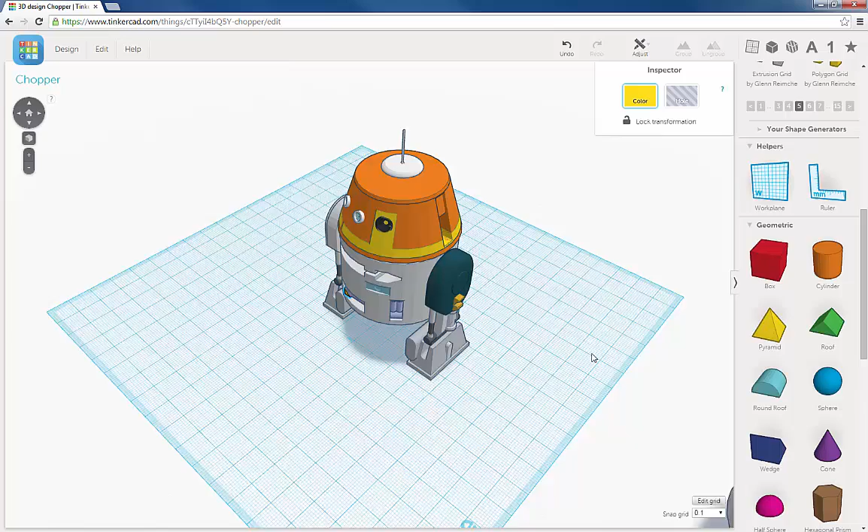Okay, let's hit this running. So now we're going to put in his arm, his rope, his little mechanical arm in here.

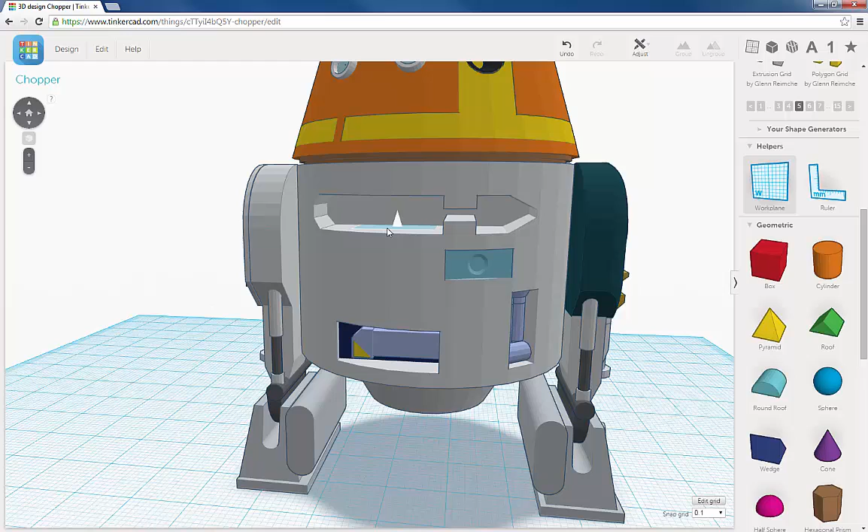So, best way to start that would be to put in his cylindrical joints. We're going to use the work plane tool, it's going to make our life a bit easier.

And instead of using the standard cylinder, I'm going to use one of our cylinders here because they give you a bit more control. So I just have to find the right one.

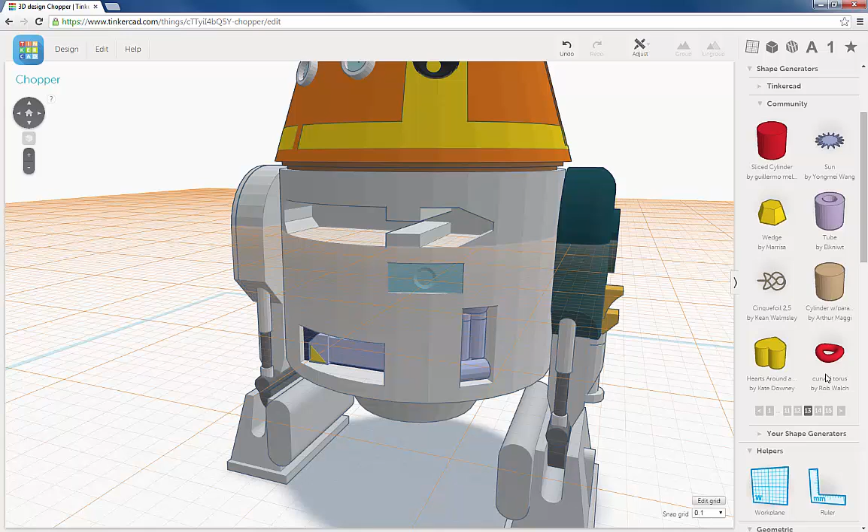It's not these. There's one other one. Okay, I think this is the one we want.

So let's see, yes, we can control the radius. So right now, let's drop this down to 3 by 3.

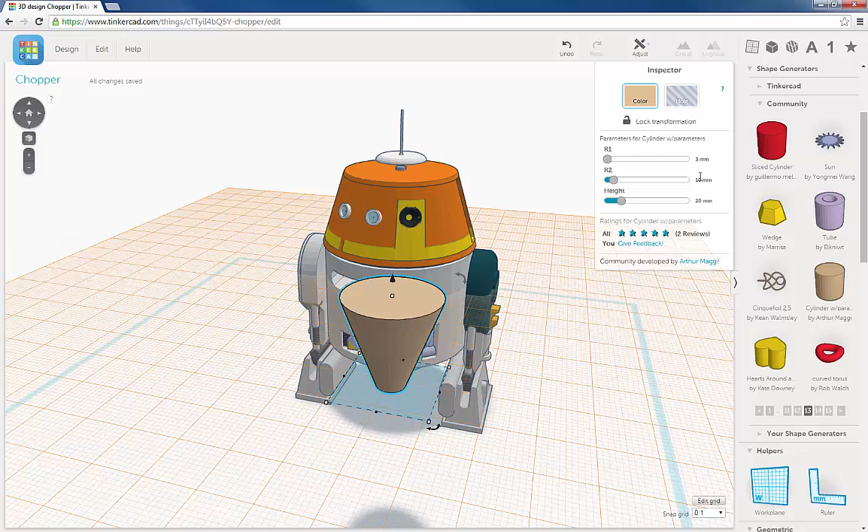Still too big. Height down to 2. The height, that is. Alright, now let's move it over so we can see how it looks.

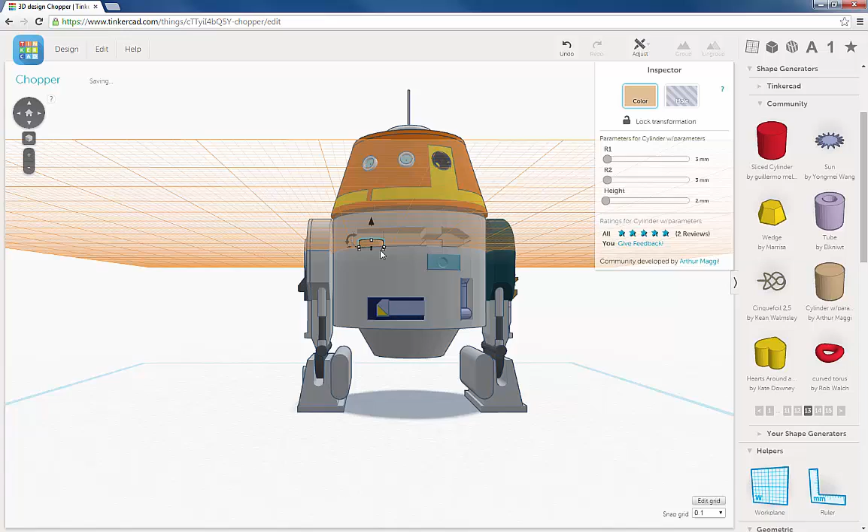Hit F to zoom in. Okay, so yeah, that's a bit too big. So let's go down to 2 by 2.

Okay, I think that's about right. Go to 1 millimeter in the height.

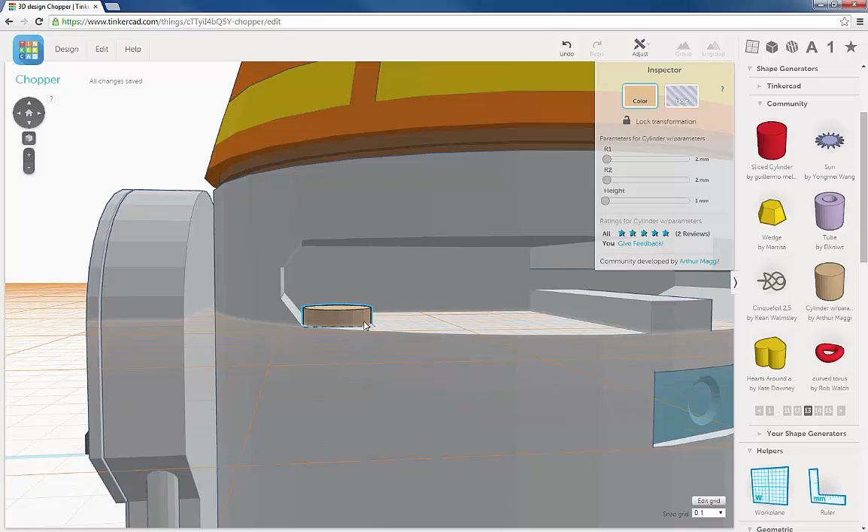Might be able to go to 2. It's a little high, so let's try 1.5.

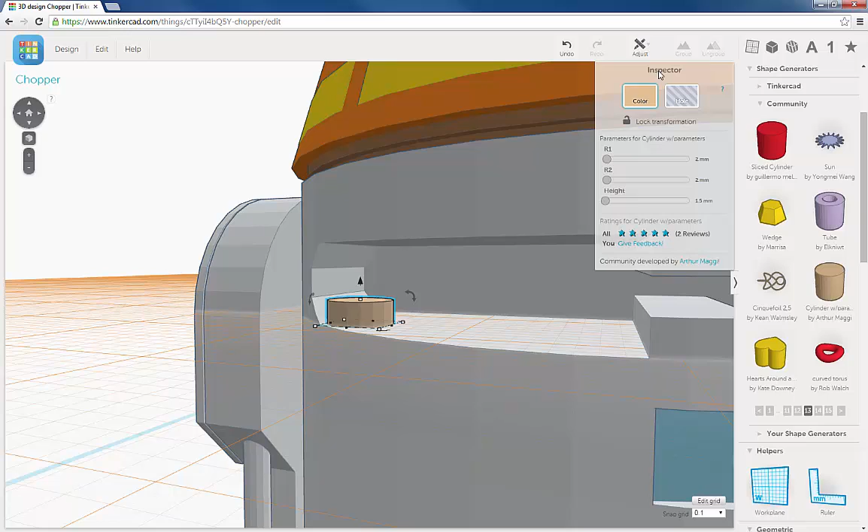And I'm going to change the color. So we're going to go edit, duplicate.

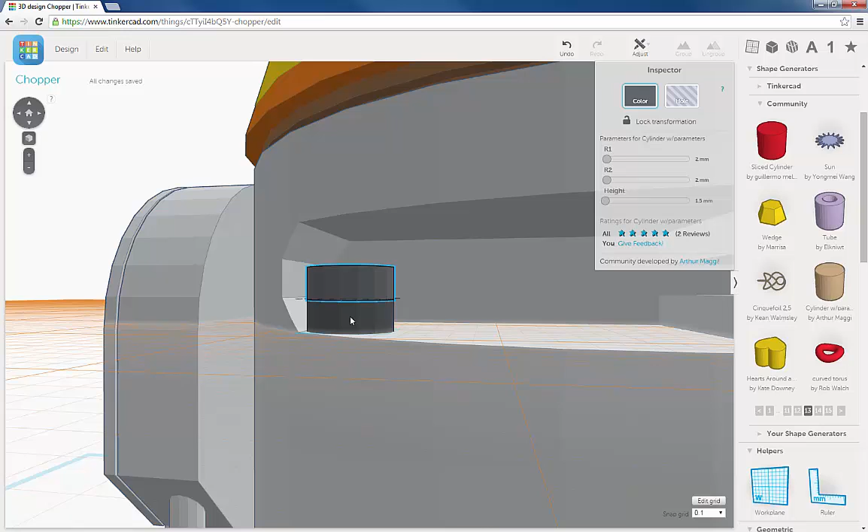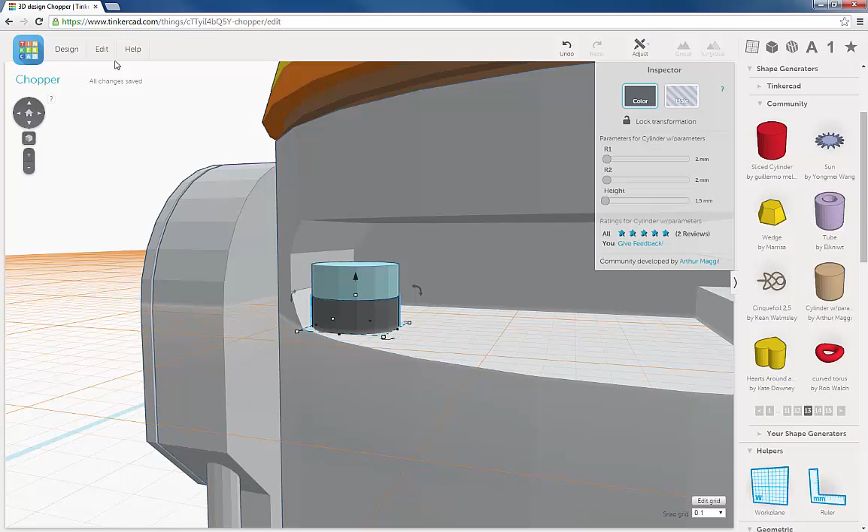So here's the center one. And this one actually is a lighter color, so we're going to go with, let's go a little bluer. Okay, and we'll duplicate this one again.

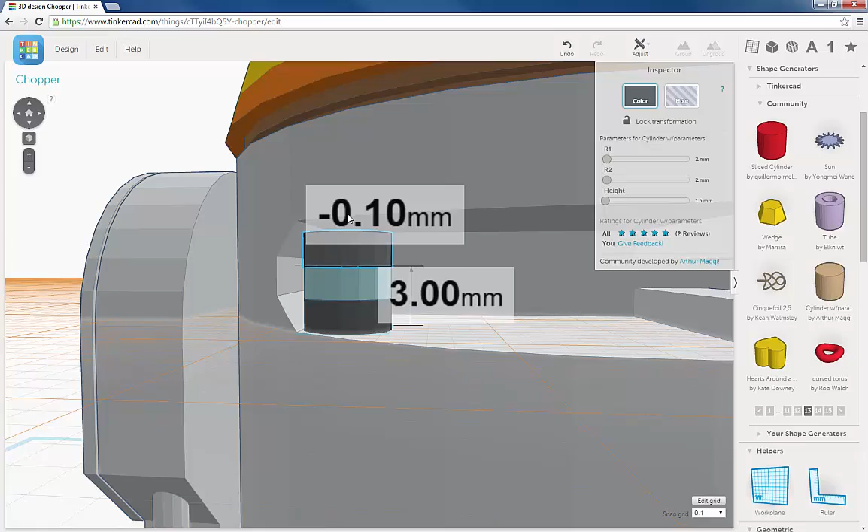Okay, that looks pretty good. Let's pull back and take a look.

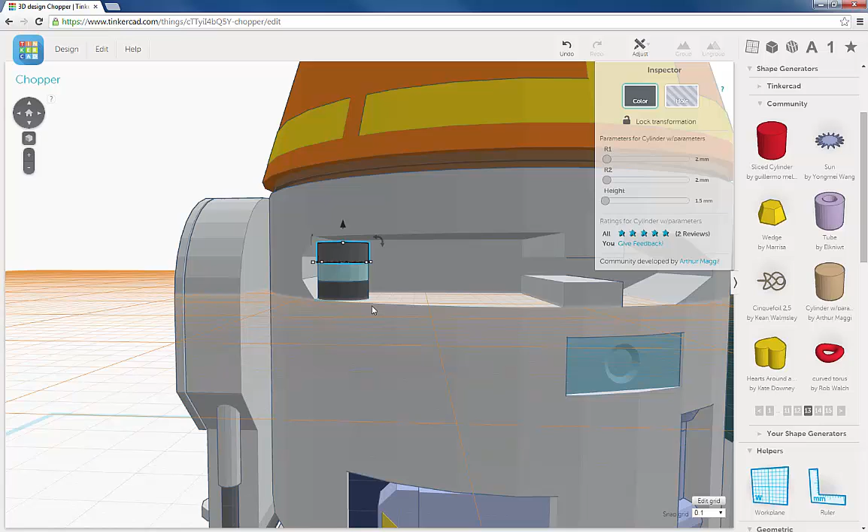So when I look close, these are a little thinner than this, so I'm going to drop that down to 1, and this one to 1.

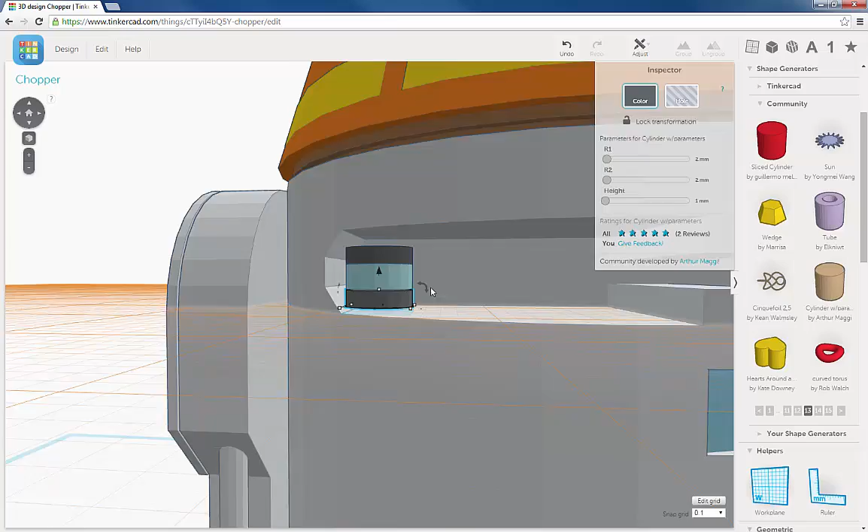Okay, move it up. I think that feels better.

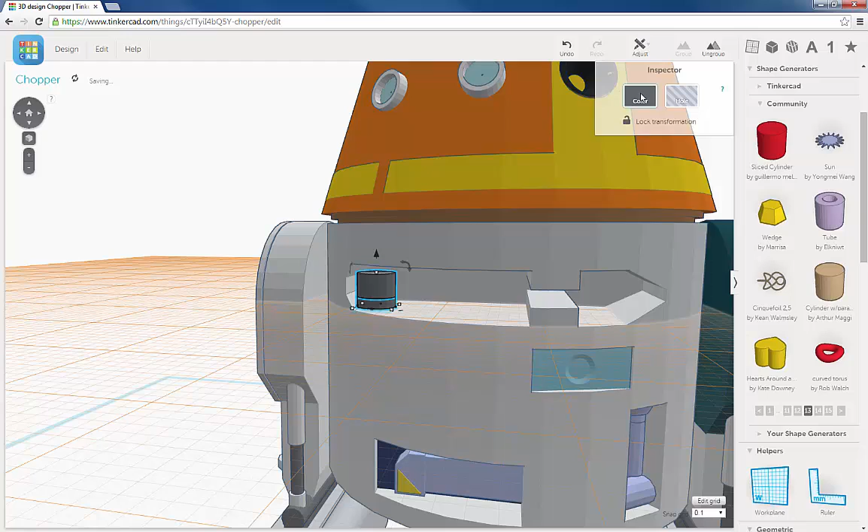Now there's a cylinder connecting it to the next one, so let's make another one. We're going to select these 3 and create a group. We'll go under color, multicolor. I think I missed it. There we go, alright.

So I'm going to duplicate this group, and let's slide it over.

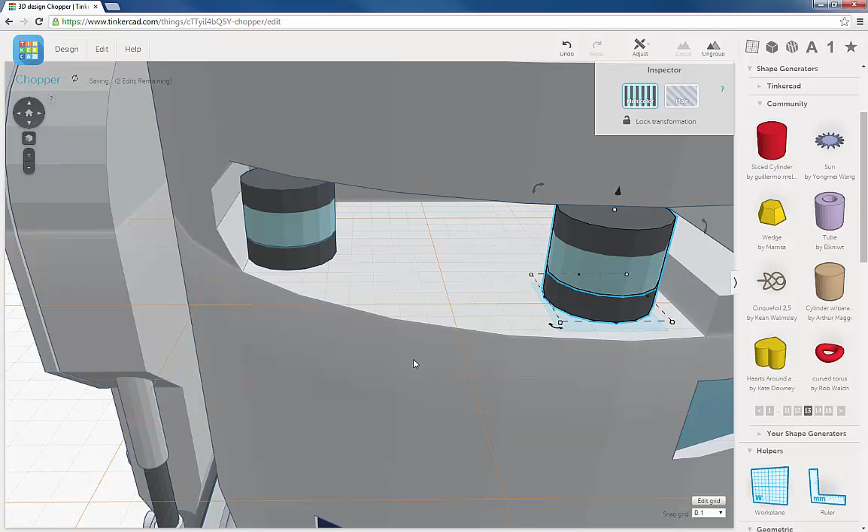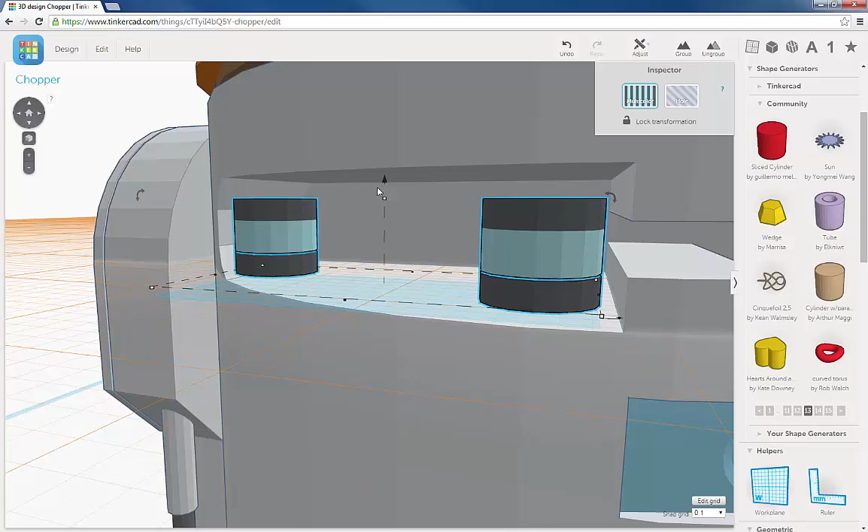So we want this part to be pretty even with this because there's going to be a cylinder coming through here. So select both of them, we're just going to raise them up just a little bit. Yeah, that's looking pretty good.

So deselect, select this group, I'm going to ungroup it, I'm going to rotate this 90 degrees.

And I'm going to undo that because I forgot to duplicate it. So edit, duplicate, now let's rotate it 90 degrees.

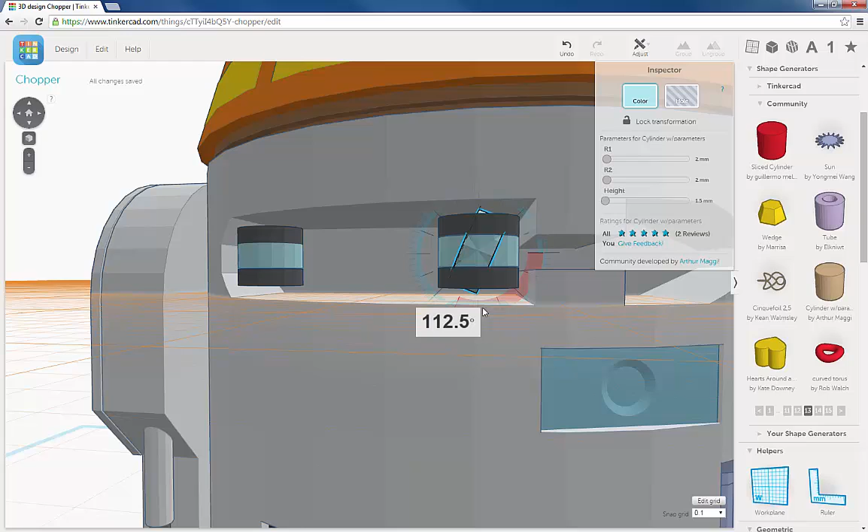Alright, so now by keeping these controls, using this cylinder with the controls, it's easier for me to go in and make these changes and know that this is going to stay centered.

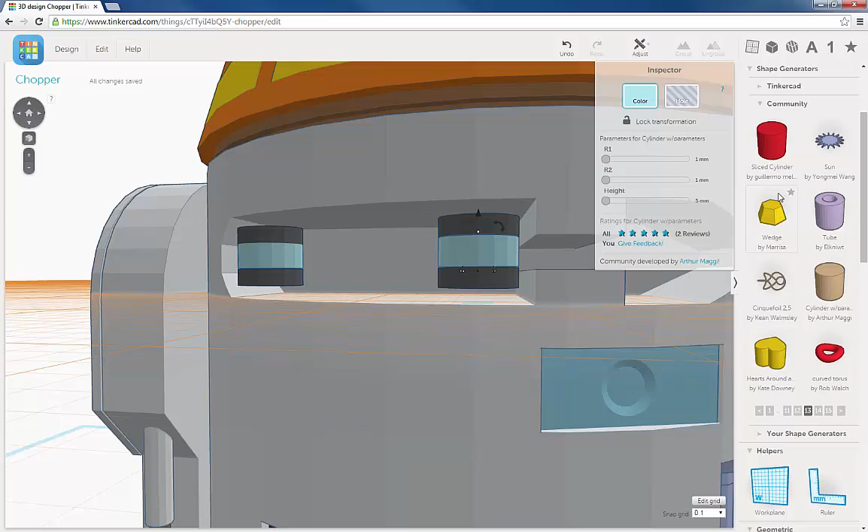And I'm going to increase the height to 5. Use the arrow key.

Still a little thick, needs to be a little longer. So let's go to 6. Right, and let's go 0.75.

I think this will do that. Yeah. 0.75. Alright.

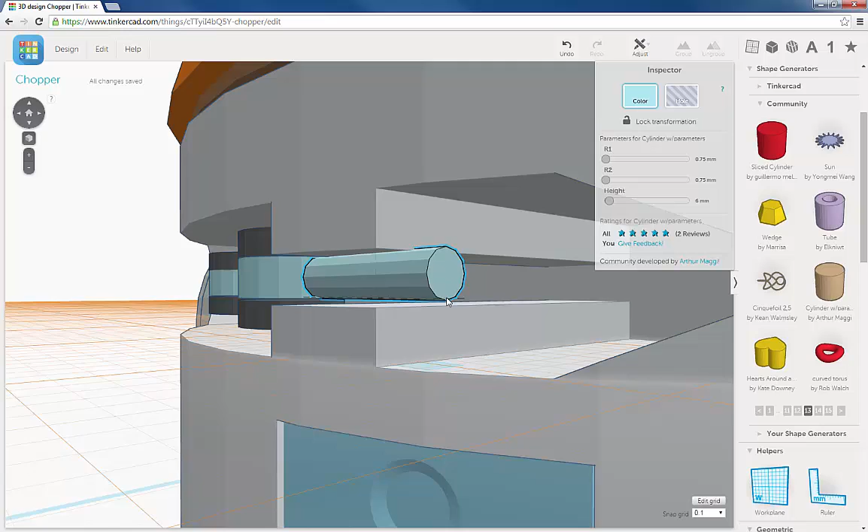So we need to regroup this group, multicolor, and select that and that.

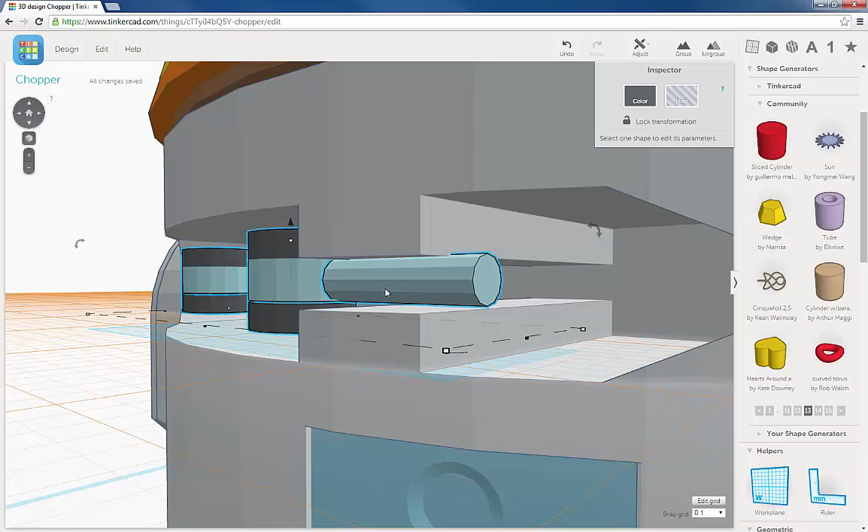So we want this fitting in between this hole that we made here. So we just move that down and we keep everything aligned. Okay.

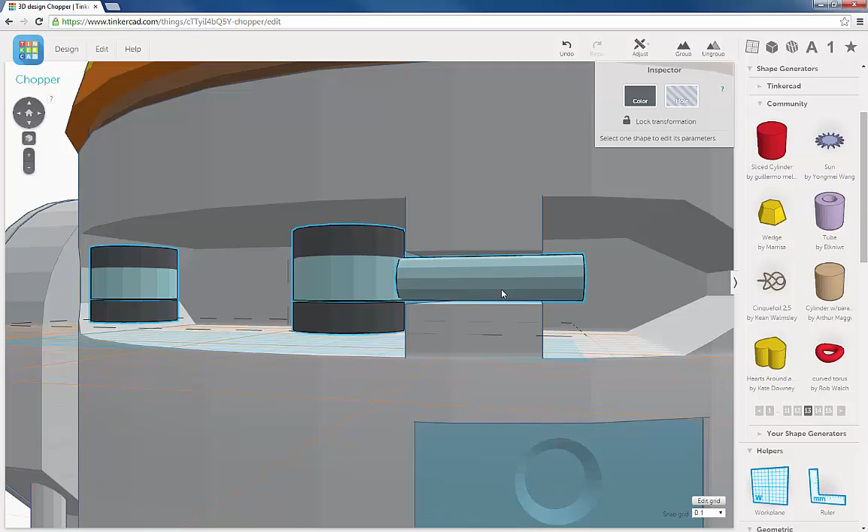I'm going to select, deselect, select the cylinder, change it to this to match. Okay.

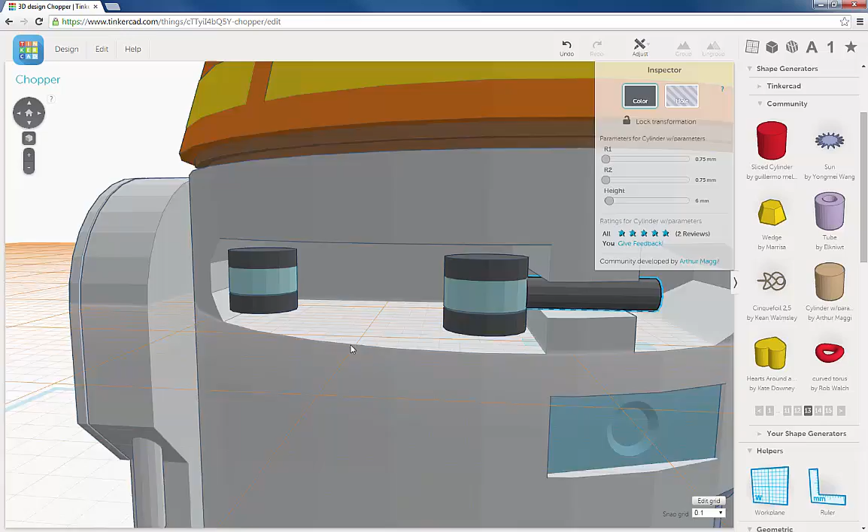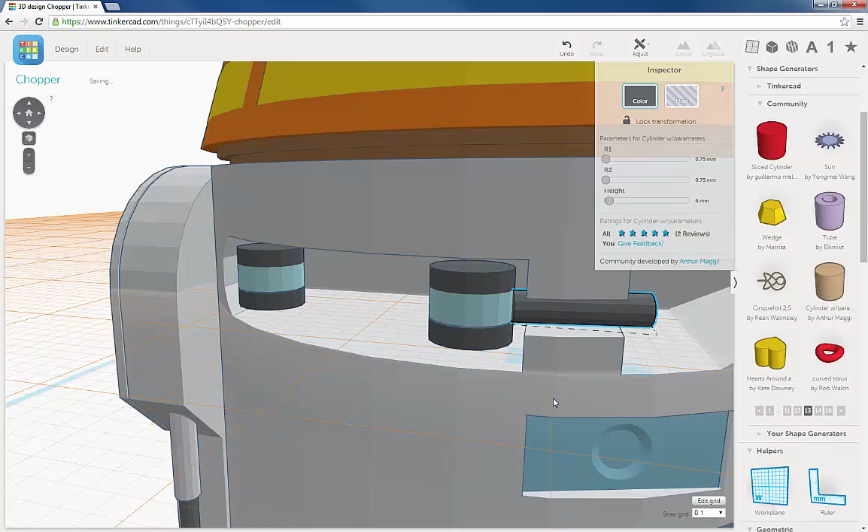Alright, now I'm going to rotate this a little bit. Okay, use the left arrow key.

Alright. Probably make this a little thinner. Go 0.5. There we go.

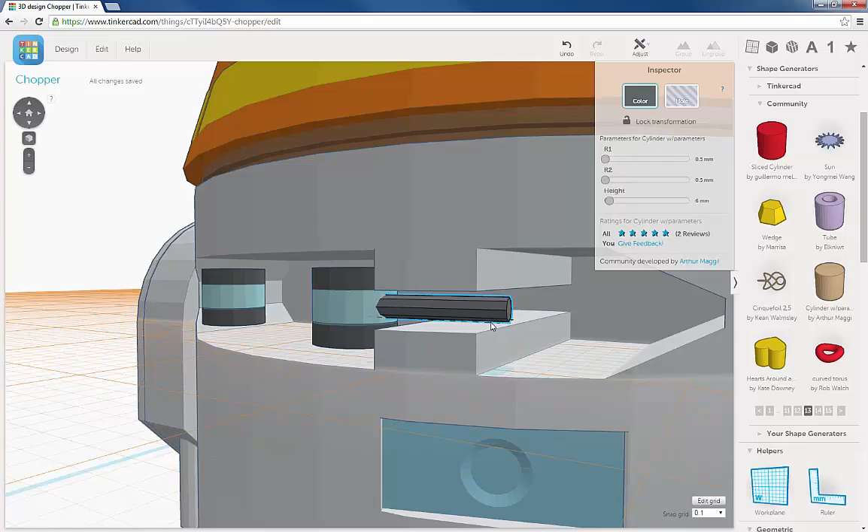That'll do for now, and then we'll set up this cylinder. So select this, ungroup it, select this piece, edit, duplicate, gonna rotate it 90 degrees.

And this one, change the color, and let's increase the height to 10. Alright, use the arrow key to move it out.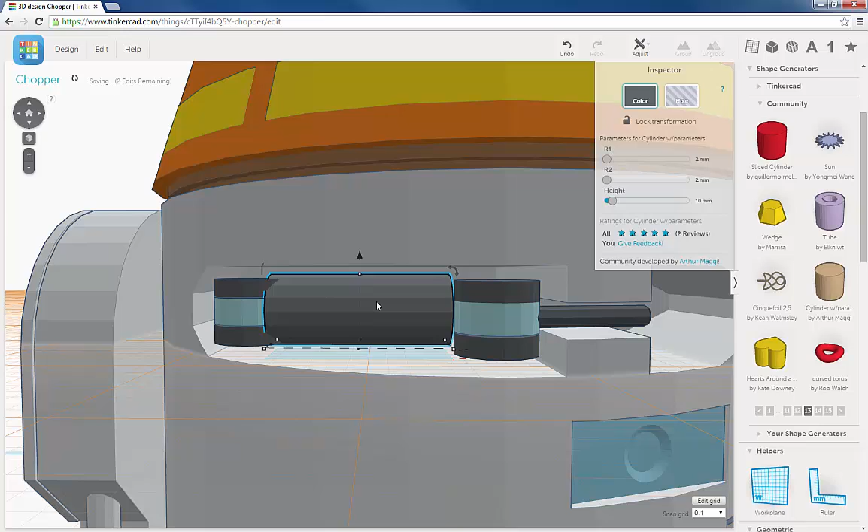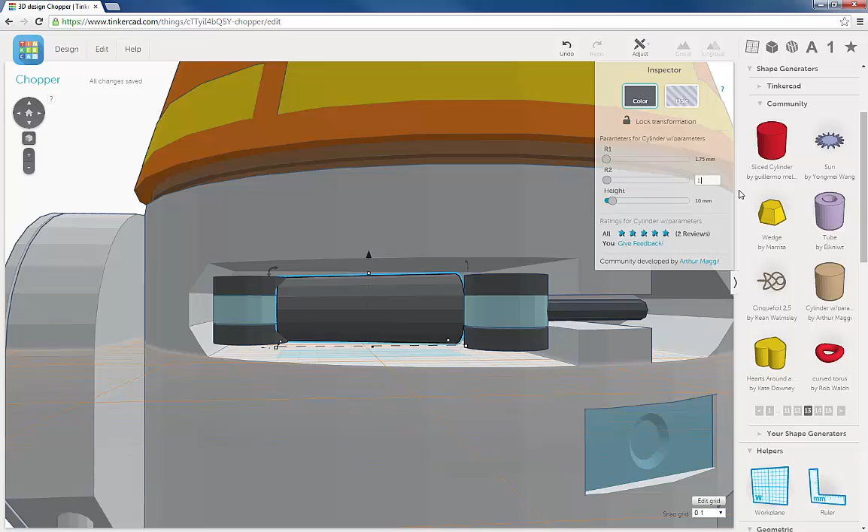Make it 1.75. And 1.75. There we go.

Now I'm going to rotate it so we want it to connect to the other joint. Okay.

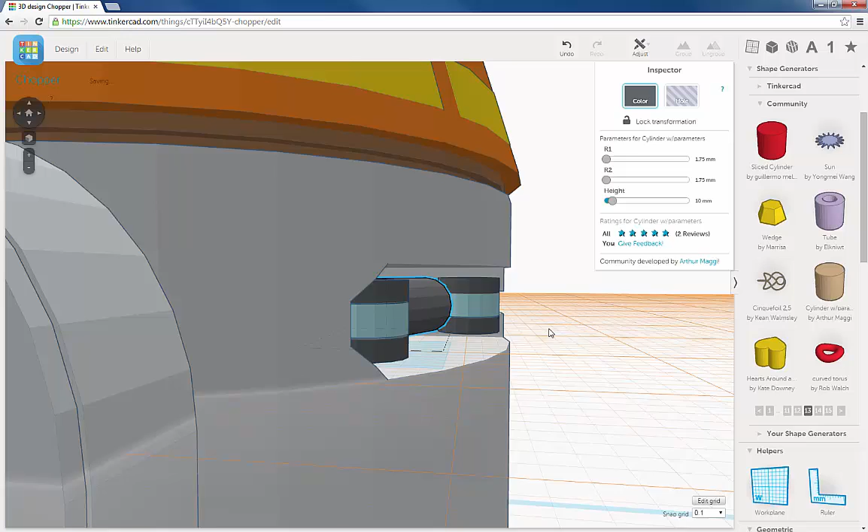Now we'll use the right arrow key, just using our eyes, and rotating around, seeing how it's looking. Not bad. This needs to be a little longer, it appears.

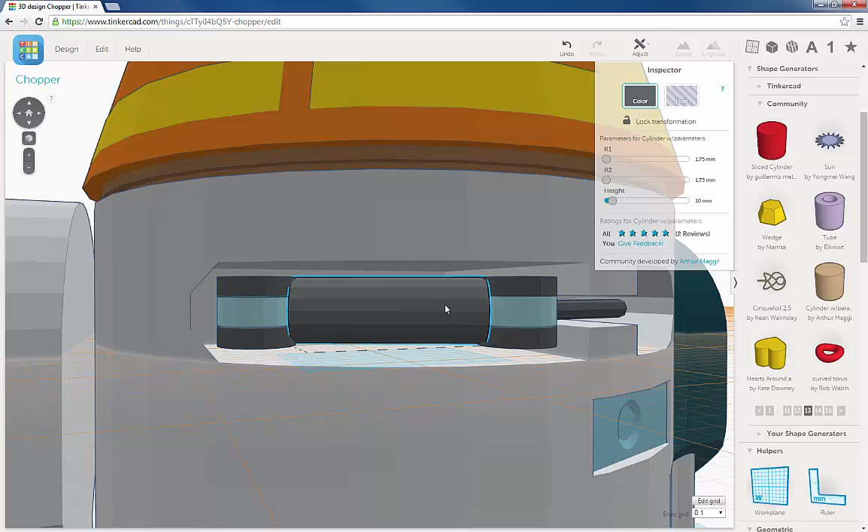Okay, alright, that's looking good.

Probably go darker. Let's try. Yeah, that looks better.

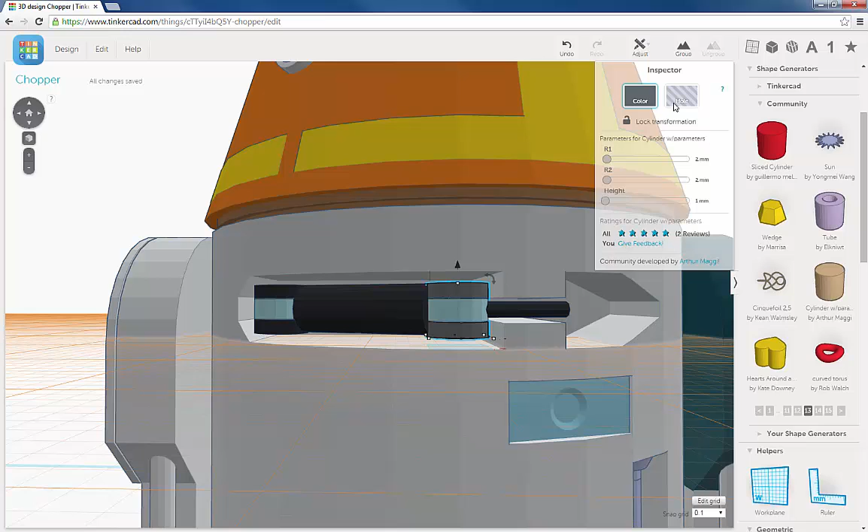Alright, so group that. Same thing. Alright, much better.

So that's part one. In the next one, we'll try to put in the claw and put a little detail on this. So I'll see you in the next lesson.